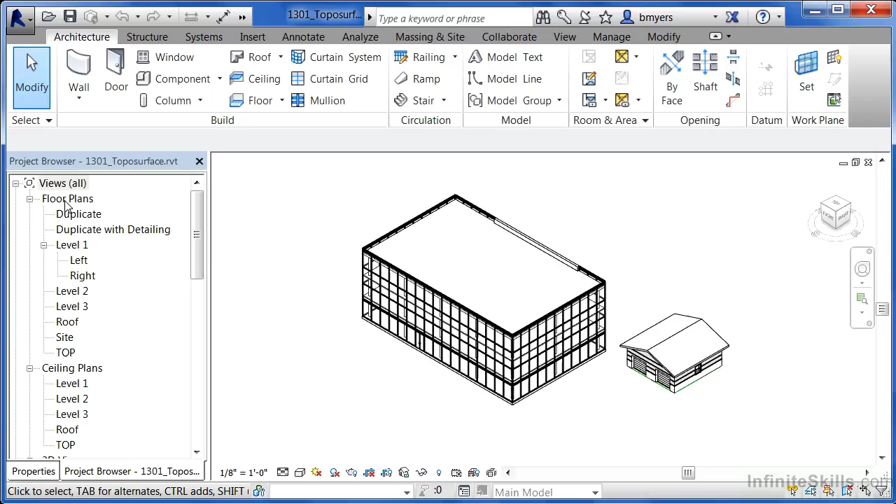In this exercise, we're going to learn how to create a site for our building complex. To do this, we first need to come underneath Site in our project browser. Under Floor Plans, we're going to open up the Site view. From here, we can zoom out so we can see the outer extents of where we may draw our site to.

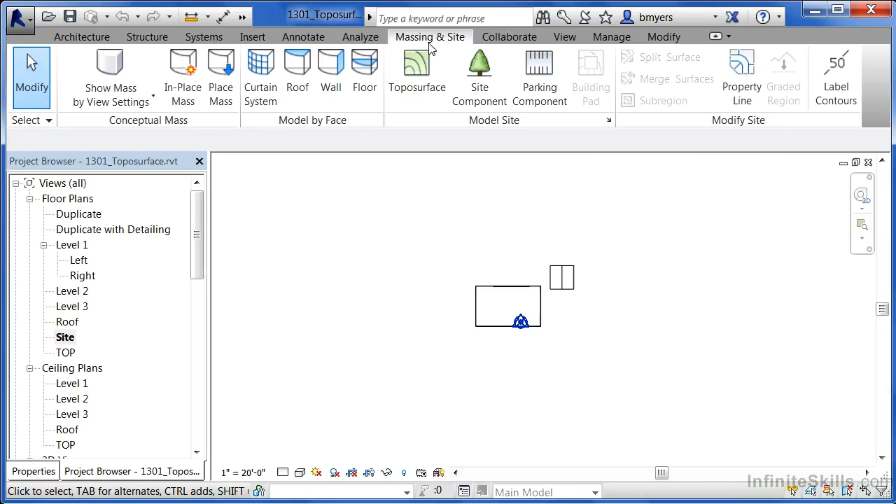Now we need to use the Site tools, or in particular the Toposurface tool, to draw in where our site is going to be located at. To do this, come underneath the Massing and Site tab and pick on Toposurface. Where it says Elevation, let's give this an elevation of 3 feet.

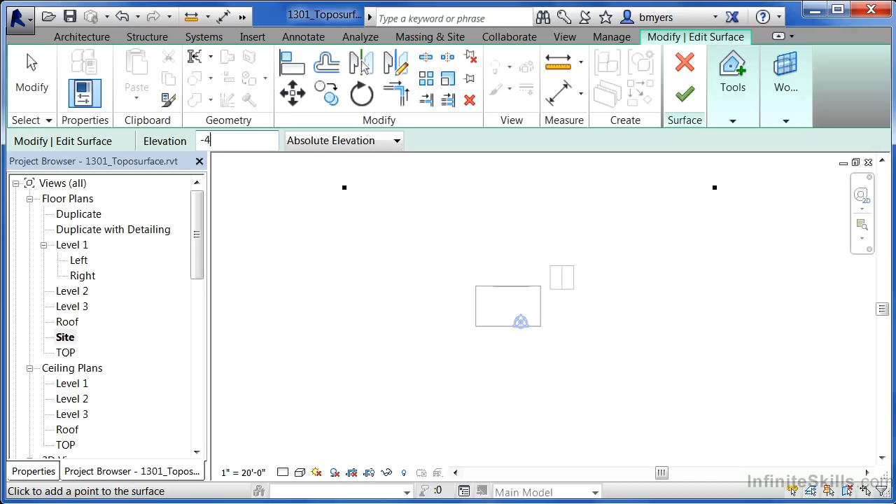And the first spot that we're going to pick is going to be in the upper left-hand side of the screen. Pick another spot straight across from that previous spot that you picked, but in the upper right-hand side of your screen. For the next elevation, make this be a much smaller number. In this case, we're going to do -4 feet. Click somewhere right in this general location.

What it's done is it's automatically created our different contour lines from this elevation down to this elevation. Click again down over in this area, and we can see it continuing to create our site and the contour lines that are associated with that. As for the elevation I like to have around the building, let's make this be -8 inches.

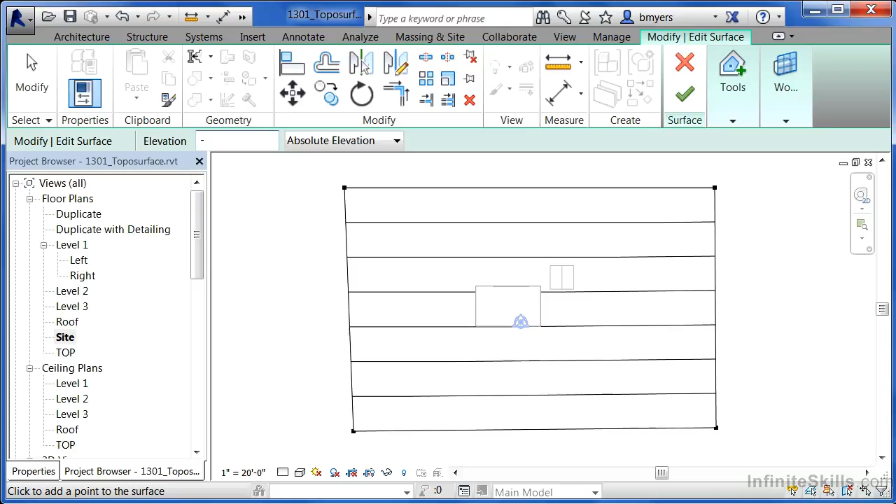Pick each of the corners that are going around our building. By doing this, those spots are at -8 inches. You can start to see that this is sort of going around our buildings now instead of going directly through the buildings, and it's all starting to flow down and in this direction. So if any water starts to fall due to rain or whatever the case may be, it's going to start to flow toward and then ultimately around our building down toward this portion of the site.

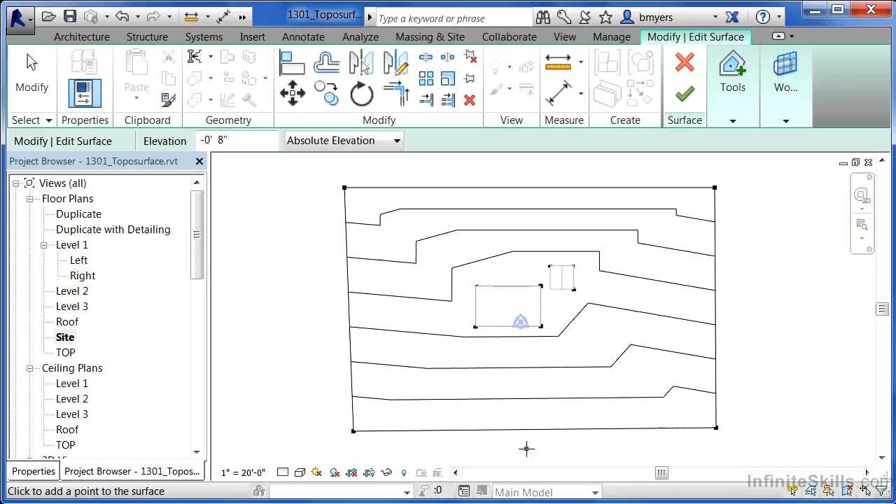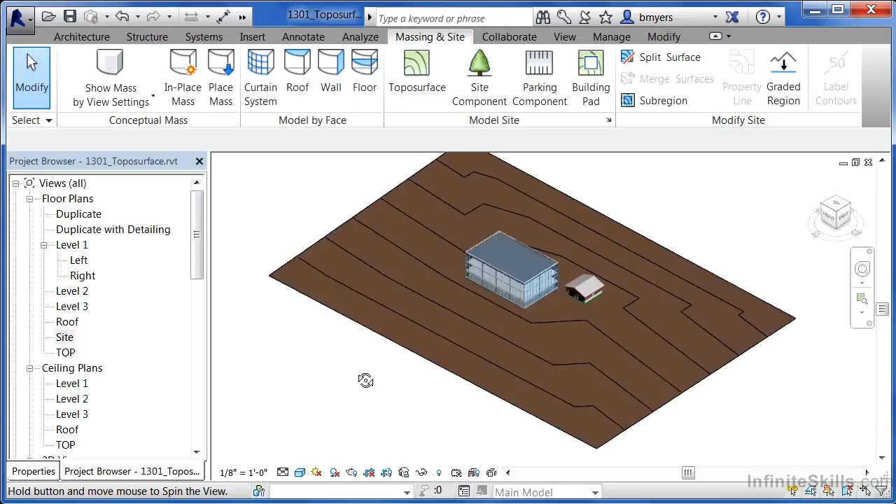Now that we've done that, click on the big green check mark to finish that off. Come up here to the top and click on the little house icon, the 3D view command. Here's the site with its contours. If we move down here to the visual styles, we can even turn on shaded to start to see some color. You can spin your model around by holding down the shift key as well as the wheel on the mouse to see how it's sloping down. Our building is currently sitting right there on the site.

So we were able to create this toposurface, also known as a site, by coming up here on the Massing and Site tab and then picking on Toposurface and picking each of these points and setting the appropriate elevations for each of those point locations.